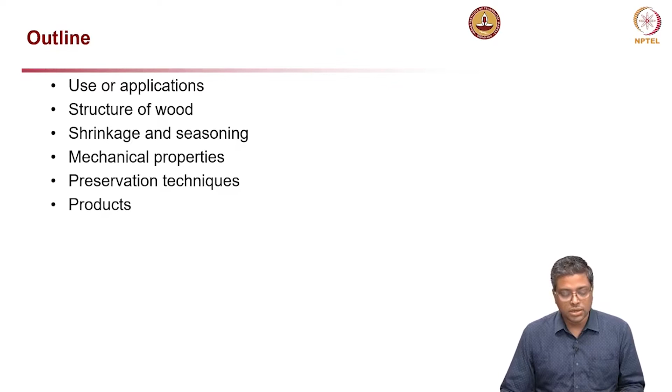As part of this MOOC course on basic construction materials, today this lecture will cover wood and wood products. We will talk about uses or applications of wood, then look at the structure of wood, how it is made, and then look at shrinkage and seasoning - shrinkage related problems and how to address that. One method is seasoning. We will also look at the mechanical properties of wood, briefly on preservation techniques, and a couple of products, including how damage mechanisms occur.

Now, use of wood - where do we apply or use wood? It is one of the earliest construction materials used by mankind, and why we were using it: because it is easy to use, durable, and has high strength, depending on which direction you are using it and what type of load is applied. It is also lightweight, widely available, low cost, and looks good because of the grains and structure, which gives a good design appearance. It's relatively low cost compared to other materials, though cost always depends on many factors - generally it's cheaper if available in plenty.

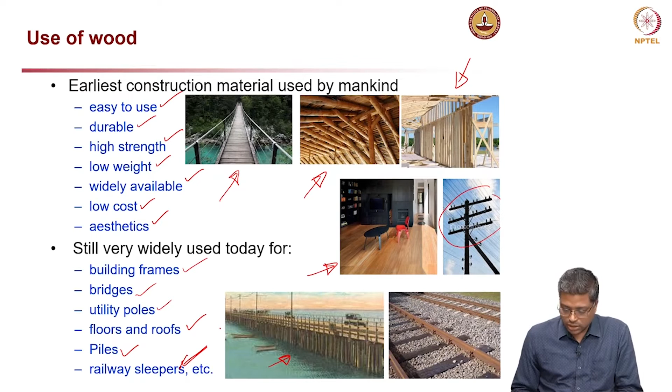Now, trees in general can be divided into two broad classes: hardwood and softwood. Hardwood is generally available in tropical climate conditions. The leaf structure shows a strikingly different appearance between the two - hardwood is broad-leaved and deciduous, meaning they shed leaves annually, and they are generally porous in structure. Examples are teak, sal, oak, etc. Then we have softwood, which are conifers with needle or scale-like evergreen leaves, non-deciduous, and non-porous. Examples are fir, pine, cedar, etc. Looking at these two classifications shows what geographical location or climatic condition these two types of wood are present in.

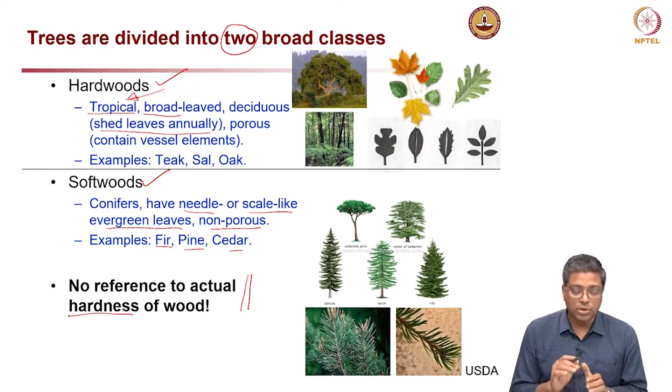Now, one more important thing: the names hardwood and softwood do not reflect the mechanical hardness of the wood. This hardness has nothing to do with these terminologies of hardwood and softwood - just remember that.

Then, what are the types of wood or species available in India?

We generally use teak a lot, mainly because it's easy to work with. If you ask a carpenter what is the advantage of using teak wood, they will say it's easy to work with. In other words, you don't need much energy to chisel or cut that wood, to work with it.

Also, another technical reason is it has good dimensional stability, that means it does not shrink or swell as a function of time, not as much as other types of wood. And it is durable, which is why it is very, very costly also.

Color is definitely one thing, because aesthetics is a function which we look for, and also dimensional stability, strength, and how easy it is to work with that timber or wood—these things we should really worry about.

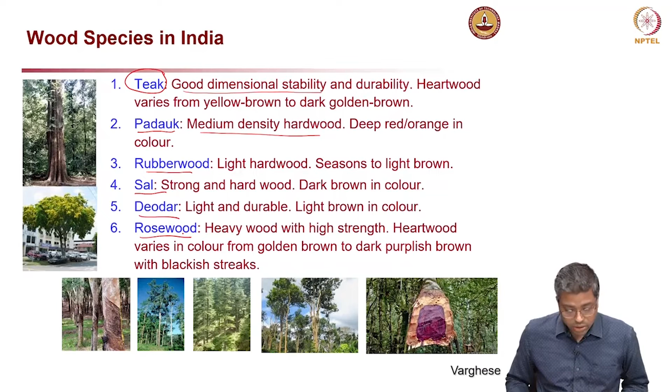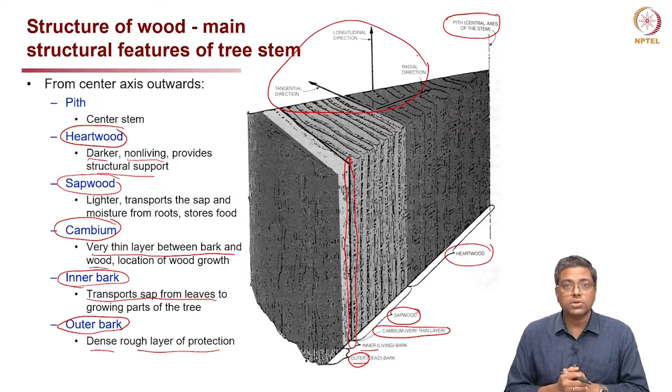So this is in general what, if you take a timber or cut a wood, you can look at the cross section and see these different regions on a wood. Now, there is also another important thing to look at, the direction - longitudinal direction, tangential direction and radial direction. I will discuss this later, but just remember that the properties change as we look at timber in different directions.

Now 50% by weight of wood is because of the presence of cellulose, and its specific gravity is about 1.5. So high density, and that leads to higher strength also.

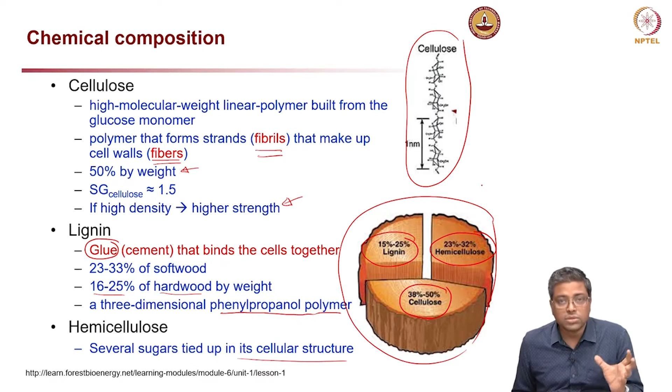Main thing is to look at which are the key components, and what is roughly the proportion and their role. So most of the properties are provided by the cellulose, and lignin plays like a role of combining or binding these cells together, and hemicellulose is different sugars tied up in cellular structure. So this is what the chemical composition is.

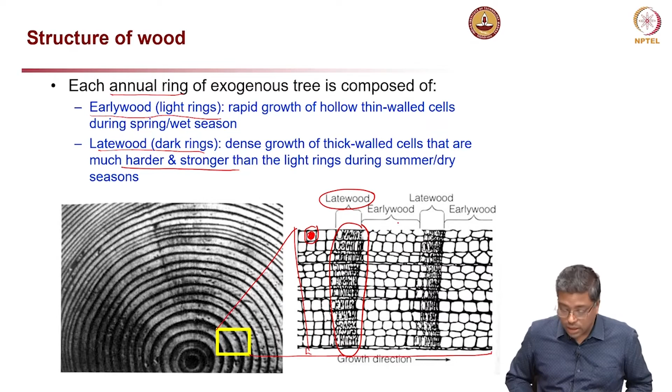Now the third one is showing the rings we talked about, the growth rings. Very clearly you can see the growth rings, and you can see the early wood and late wood here. So just to re-emphasize: the denser ones are the late wood, and the lighter ones are the early wood.

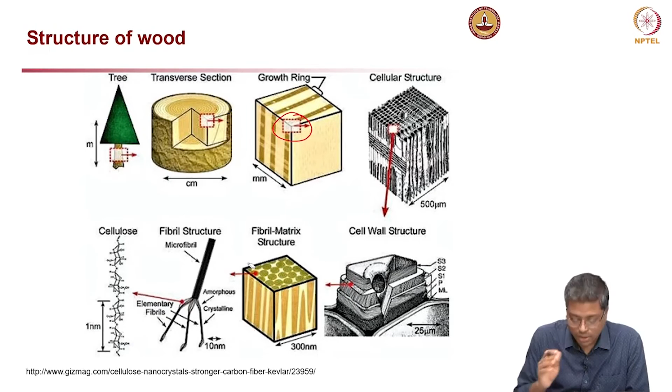So, if you just try to pull it out, it will come off.

Now, wood or timber with this kind of knots may not always be good when you look at mechanical behavior. What happens is the cambium, which is the growing part of the wood, is a thin layer between the bark and the sapwood, or between the sapwood and the heartwood. So, this thin layer of cambium, if that gets dead, then the knots also get dead, because there is no further connection between them. So, because of that there is a lack of continuity, which also affects the stress transfer, etc.

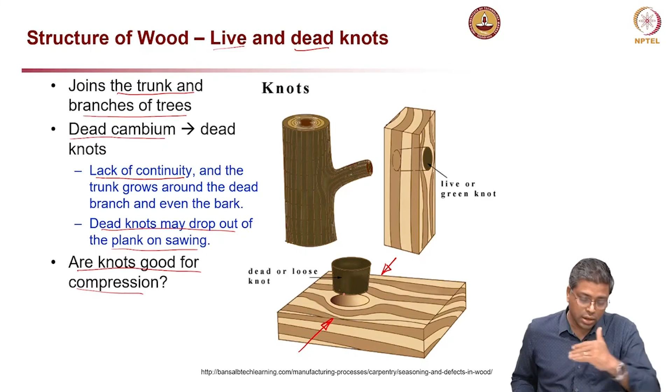Now, properties of wood are anisotropic in nature, meaning they are very much dependent on direction. I would say even rather orthotropic in nature, but let us say anisotropic is the key word we are talking here. Now, in the longitudinal direction, that is along the stem or along the grains, parallel to the growth rings and parallel to the axis of the growth rings.

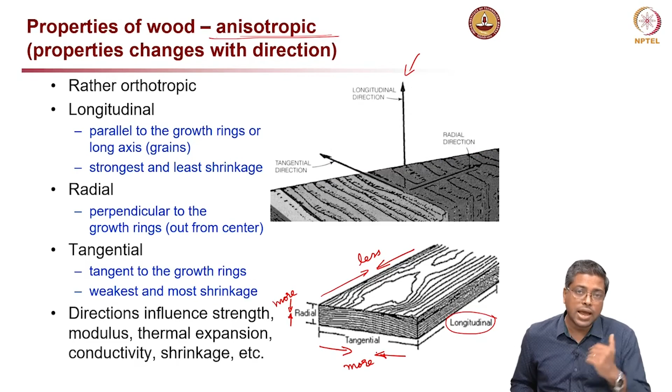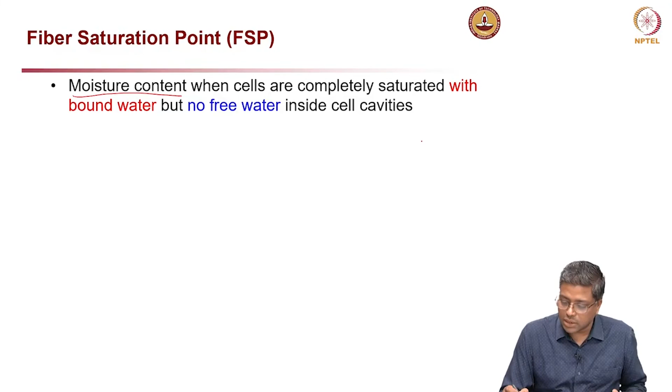Now, there is something called the fiber saturation point. What is that? This is the moisture content when cells are completely saturated with bound water, the water which is chemically bound, but no free water inside the cavities, inside the cell cavities. So, the cell walls—let us say this is the cell wall, let me draw it again—these are the cell cavities, assume that this is a wood cell, and this is the cell wall. Now, the water is held tightly in cell cavities, and wood shrinks on removal.

So, this is the bound water which you are talking about, and now water inside the cavity, the second one is this one. The water inside the cavities does not affect the shrinkage, okay.

First when you try to dry wood, what will happen is, let us call this region A and this region B. First, the water in region A will evaporate, that is the free water, and then after further drying, then only the water in region B, that is the cell wall itself, will start evaporating.

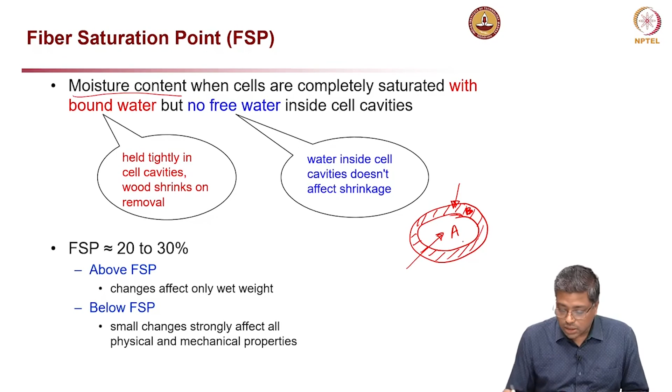Now, FSP is about 20 to 30% for most wood. So above the FSP, that means if there is still water in region A, it affects only the weight. And below FSP, that means you are now taking water from region B, and then the properties start getting affected, like physical and mechanical properties.

Let me reiterate this once more. Let us say you take a new wood, you cut it, you are going to process it, and now you have to first dry that wood. So initially you will have a lot of moisture in the wood.

Now, as you start drying, first the water inside the cell cavities, that is region A, will start drying. At that time, the only change in the wood is the change in weight, loss of water. Now, after further drying, when you reach the fiber saturation point, then the

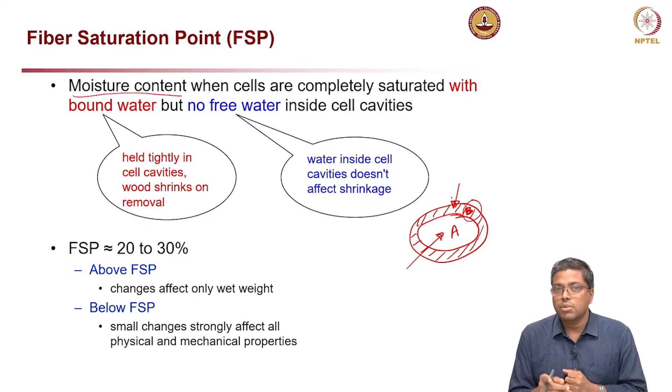water from region B also starts evaporating, and then the properties start changing. Not only weight, but also the shrinkage and mechanical properties start changing.

Now I am going to show you this thing once more. This sketch is just to tell you about the direction of shrinkage. In the longitudinal direction, as we have already discussed, it is negligible, and in the tangential and radial direction, there is twice as much difference in general.

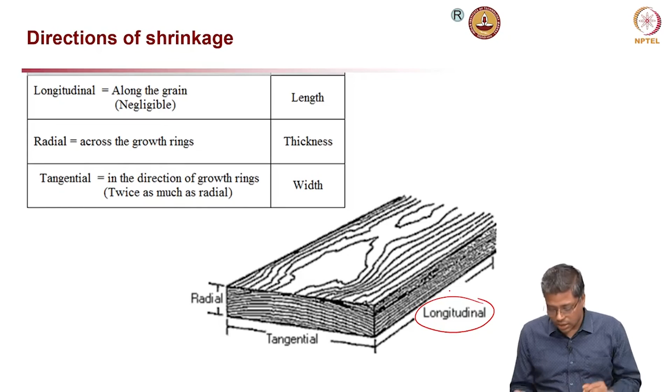Okay, this is the B region and this is the A region. So water from the cell cavity is evaporated first. After this 20 to 30%, with further drying you are removing water from the wall region, that is the B region, and that leads to change in the properties.

So, the largest shrinkage happens in the tangential direction, and then the smallest shrinkage in the longitudinal direction, as we discussed earlier.

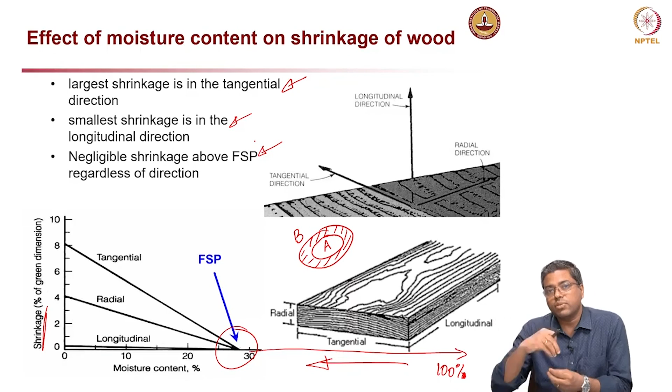And negligible shrinkage above FSP regardless of direction. Above FSP there is no shrinkage happening, because it is just water from the cavities being evaporated.

Now, damage due to shrinkage. You can see here on the left image that there are pop outs, different types of problems. If you have ever been to places where timber is used for flooring, etc., you will see these kinds of problems because of warping, etc.

You can see the right side picture shows different types of problems experienced in such structures. You can see here mildew or some fungal growth, etc., because of water droplets staying there, and then

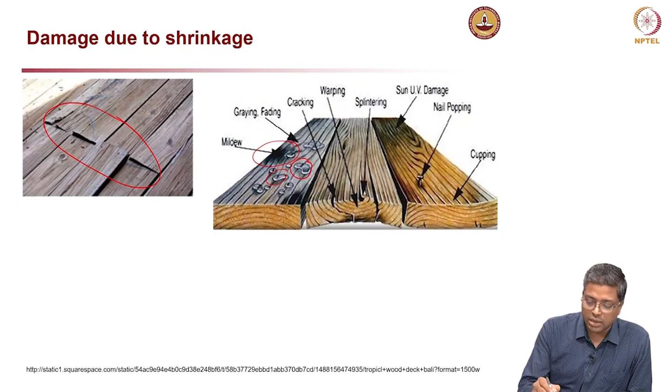color also starts changing, fading, and then here you can see cracking, and here you can see warping. You can see that this wood has turned like this, it has warped, the shape has changed. So the center portion lifts up, and splintering you can see here - small grains can come out, we call it splintering, and UV damage is also sometimes possible.

And if you have a nail, if the wood starts to warp, you can see here slight warping in the other direction, and then cracking here. Many of these problems, we call this behavior cupping, on the right side. When that happens, even the nail can come off because of the pressure exerted by the wood itself, by the shrinkage action. So these are all general problems experienced by wood and wood structures.